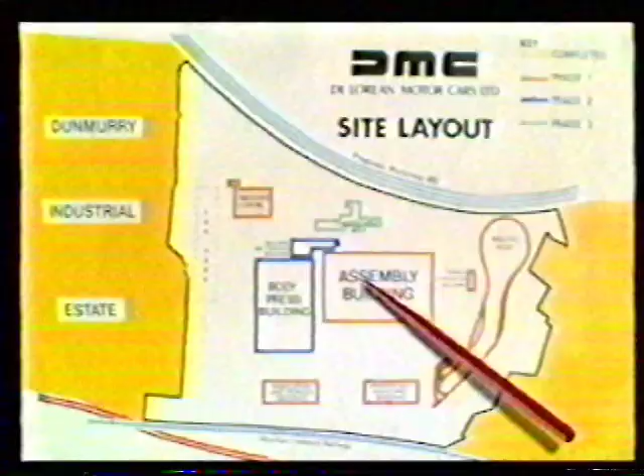Twinbrook Estate up the top here, and the main factory here. This was the original building, which was a carpet factory before we moved into it. That became the training building and the initial sort of company, whilst the rest of it was going on. This was going to be the main office at one time. That actually didn't happen. But this happened, that happened, and a couple of other buildings here, which you can't even see on this layout.

These buildings were much larger ultimately. The boiler house was there, the test track was there. I think some of you have seen that already, and you'll certainly see it tomorrow.

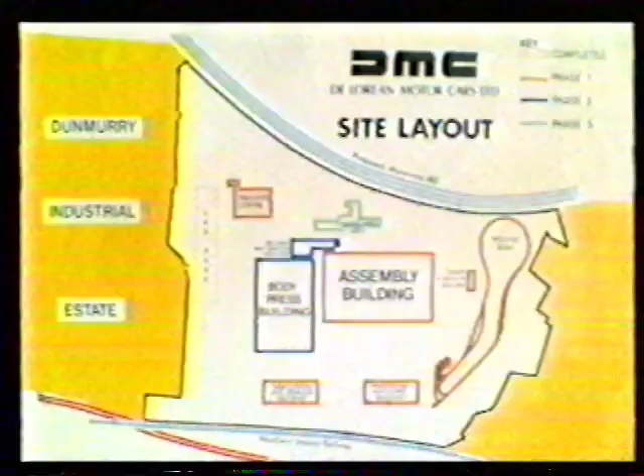There's the original building and the original entry there through Twinbrook. You'll have noticed that the later entry was through the bottom end here by the railway bridge, and that originally linked to the main Derriaghy Road, where it doesn't now. You have to go up through the industrial site.

So that was the site, the original site, just the other side of the railway from here.

One of the problems we didn't anticipate was snow. Never rains very much, and it never snows in Ireland, they said. It's a lovely mild climate. Grass grows 10 months in the year. No real difficulty, they said.

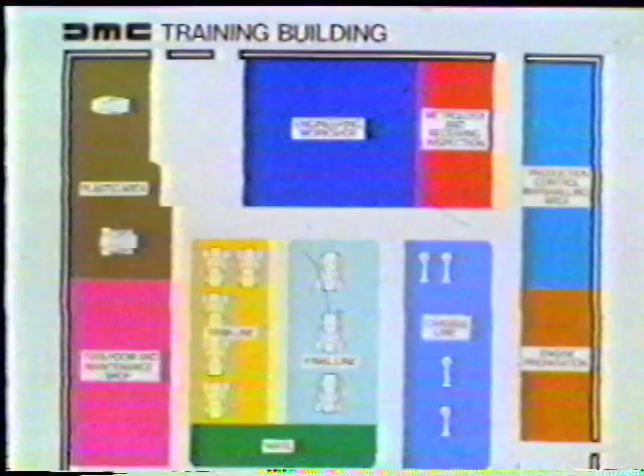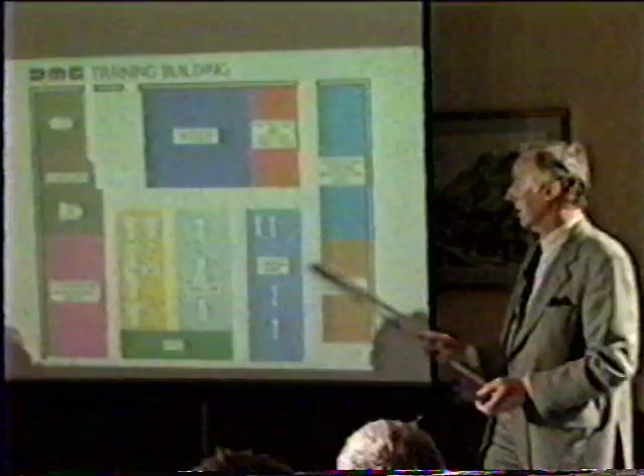One of the big advantages of Northern Ireland from our point of view was that although there's a great tradition of engineering over here, it was at each side of automobiles, shall we say, shipbuilding on one side and aircraft on the other. So whilst you might say you're starting from scratch with engineers, people building cars, you didn't have to unlearn anything. They started clean. Whereas if you picked up a crowd in Coventry, for example, you'd have to get rid of all their nasty little tricks before you started teaching them new stuff. So it was really training from scratch, hopefully quickly enough for them not to get into any bad habits.

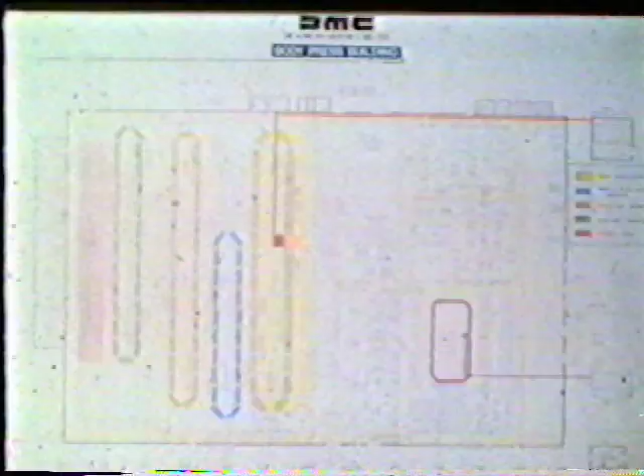This was the layout of the body press building, as it says. It's an official slide at the time. It's a pretty lousy one. However, I'll just point out 3 tracks which are fairly obvious there and one longer one here. The body, i.e. the fiberglass hull, was made in that area. The construction system consisted of hand laying the fiberglass mat into tools, into dies, and injecting the resin, closing the 2 halves of the body together, allowing them to preset green, taking them through the oven so that they finish the cure, and then finally taking them through an oven to take off all the flash and what have you, excess material.

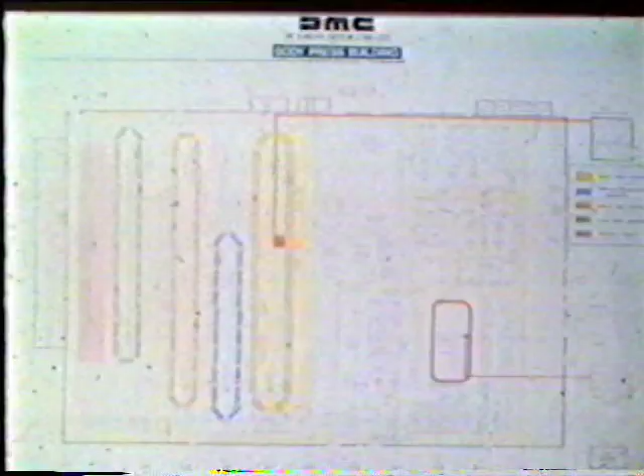Now the assembly building, you recall that the body press shop was that side there. So the bodies were lined up and brought, they were lined up through a 24-hour production ratio and pushed across here to keep the production line going. Of course, this process was a lot quicker than the body press shop process. So we stacked them up over there and brought them in here for the next day. We saw on one of the first slides the dock levelers here with the incoming materials.

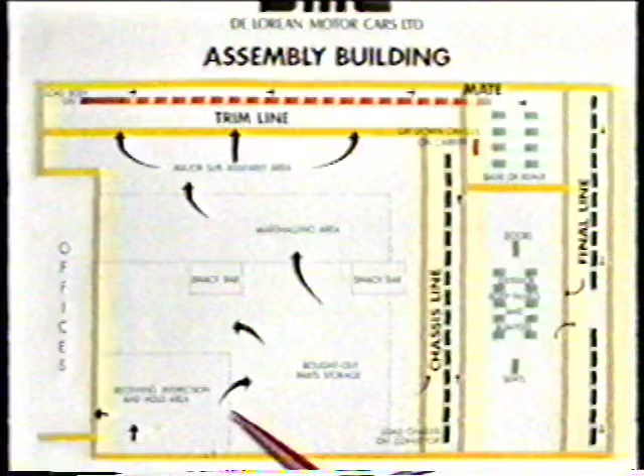So you've got materials inspection, bought out parts storage, snack bars, and so on. This lot was used to feed the line during the day. The idea was to do it overnight, in fact, but it didn't always work out like that. So they all fed the line there.

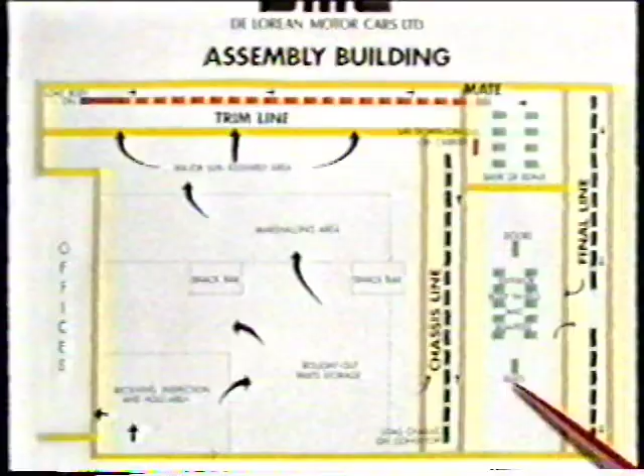We had the chassis line, the chassis dress line, being fed from one of the other outside doors here. See that again in a moment. Came together there, body drop in this general area, chassis drop onto the teller's carrier, body drop on top of it, and then round into picking up the doors and exterior panels. Finally here, which isn't shown, we had the rolling road to test the brakes, lights, steering and all that sort of thing, and to make sure it complied with the regulations.

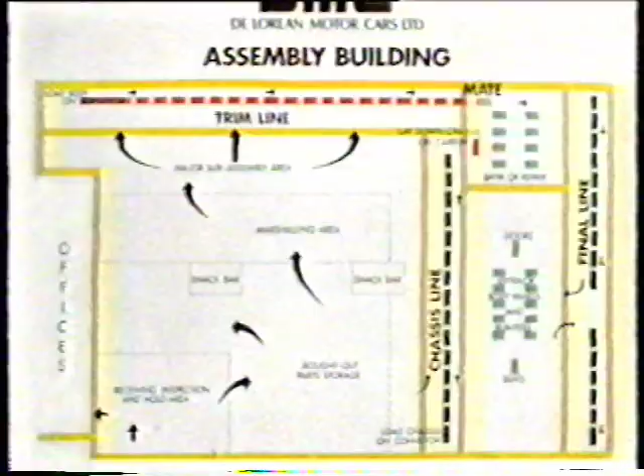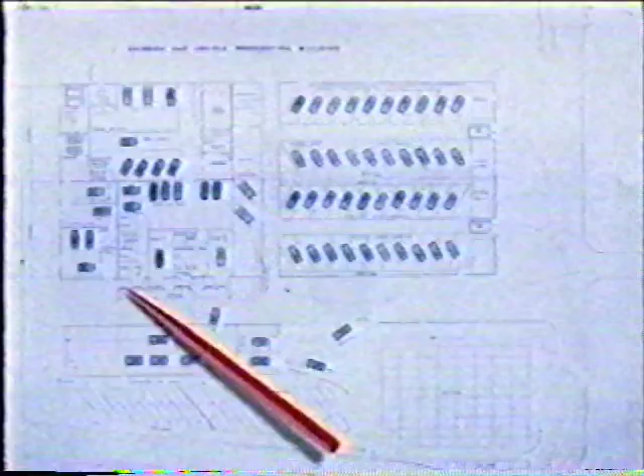There was an area in which the whole vehicle would be soaked for temperature for a given amount of time, a day and a half, something like that, to make sure it was at a regulation temperature. They would then be properly checked for the whole emission cycle before they were put out for sale. This area here was final preparation of all cars anyway, so a percentage of these would have gone through that anyway. So the cars came out of the main body assembly shop, which was up the top there, into this lot, through all this arrangement, and then finally pushed out, hopefully straight down to the docks.

So part of the testing, of course, was to go around the track, and part of it also was to go through the water test. Okay?

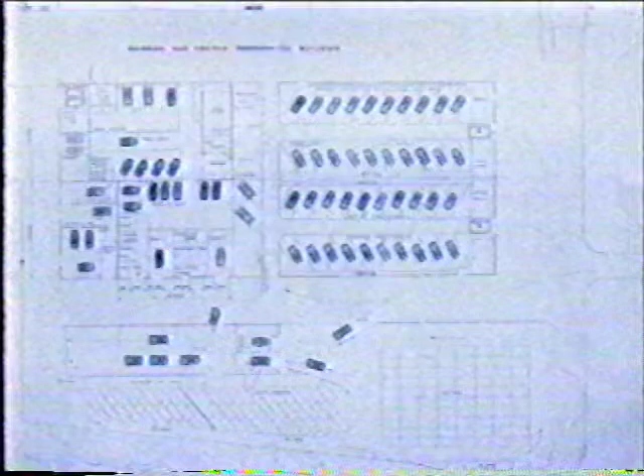As you all know, the bodies were made of fiberglass hull, using the VARI system - vacuum-assisted resin injection - a process which Colin Chapman personally owned and had patented.

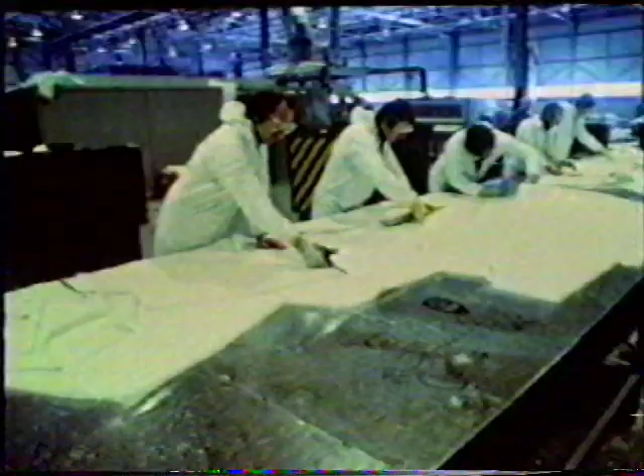So each of the bits of fiberglass mat was cut out by hand prior to being laid into the tool. There's a bevy of them. They were obliged to wear goggles. You can see rather more there, 60% of them wearing them. They're awkward to wear, but you only need one piece of glass in your eye, and you realize how valuable they are, because you can't get glass out very easily. Let it work out over a period. So you can see them cutting around the lines they've made with the templates.

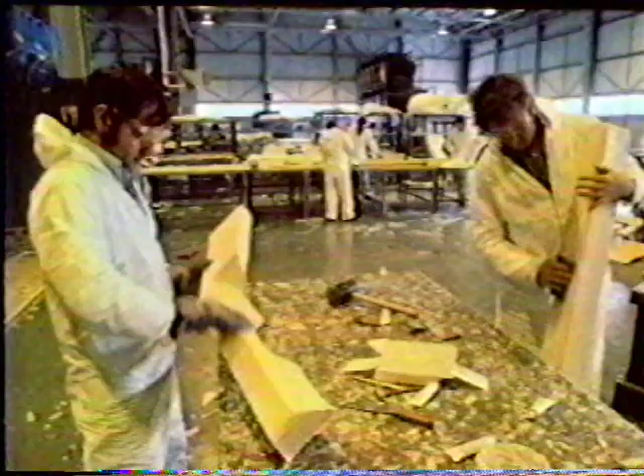The fiberglass hulls were made up, as I briefly described, with fiberglass mat laid into a mold, but for stiffness, additional strength, beam strength and so on, we used beams. Now the beam itself didn't give the strength, it was the structure around the beam that gave the strength. So these beams are made out of polyurethane foam, semi-rigid polyurethane foam, in a mold. These are the operators cleaning them off, removing the flash lines and so on, prior to them being wrapped in fiberglass mat.

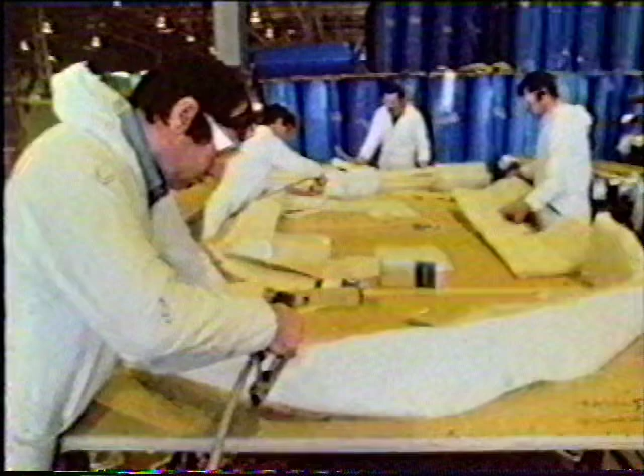Which you can see them doing here. Or you might have to take my word for it. Yes, here we are. These are the rigid polyurethane, or semi-rigid polyurethane moldings, with the lads wrapping fiberglass around them and stapling them on prior to being placed in the mold.

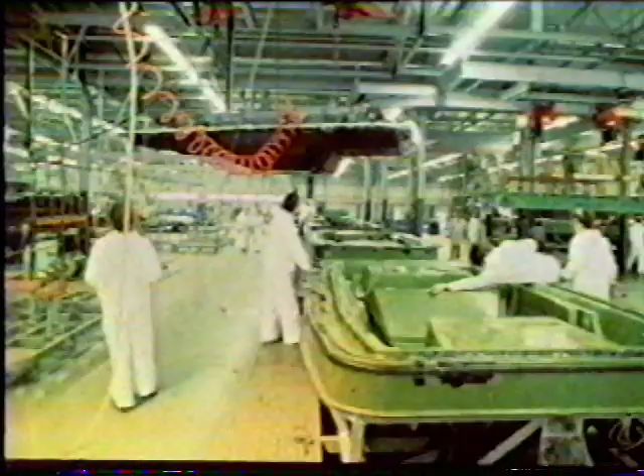Now these are the molds I was talking about. We saw them on the first parts of the track in the body press building. So these are the molds. That's the bottom part, shall we say. This is one where the top part's been - that molding's been lifted out. But this would have a mating part which would drop into it and form the other side. It's a double-sided die, effectively.

These are made out of epoxy resin with a filler and a steel frame. The top part of the die would close onto that when it's been loaded up. The whole would be subjected to a vacuum, and then resin introduced at various areas around it. Just the right amount so that it would fill in and form right to the edges. Not too much, else you scrap it, or waste too much, and not too little, else you spoil the whole molding.

Here you see them placing the fiberglass mat into the dies. We saw them cutting them out. They obviously have to be cut out into some quite complex forms so they fit in the right places, and they have to be fitted in the right manner. So there you have them doing it. You see the number of dies we've got coming through to maintain the production time cycles.

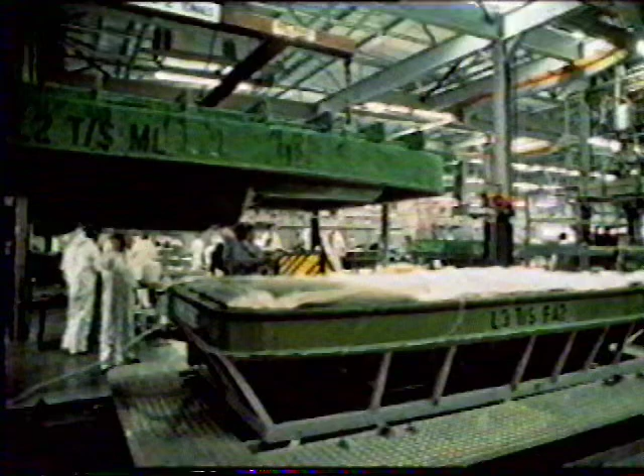That's it full. This is the top part of the die being prepared, ready to drop in. So that would form down inside with a bit of care to make sure that the fiberglass still lays in the right direction. The seal around the edge here would become tight around the edge of that before the vacuum is applied.

In order to maintain the quality of the fiberglass resin mix, we used to have, rather primitive by current standards, a computer system to make sure that it was at the right temperature, used in the right chronological order, the incoming amounts. The storage tanks I referred to were kept at a constant temperature and constantly stirred to make sure the quality of the fiberglass as used was more or less constant, reasonably consistent within reasonable standards. So we used that to make sure the quality of the fiberglass injection system was reasonably constant.

Having injected the relevant quantity, then of course it's left for a certain amount of time in the mold for the thing to at least cure to the green condition. So this is it being lifted out. You can see the track rotating, as it were, around there, circulating.

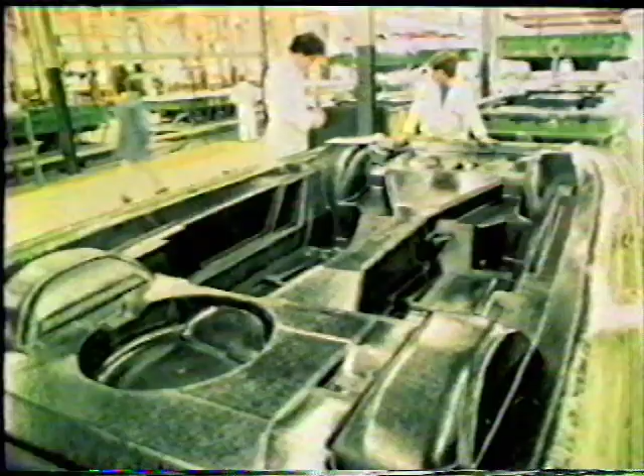And that's what the bottom part of the hull looked like. That's still in the die, of course, before it's popped out and before anything's cut off. You'll notice the door apertures are full here, and the various holes in the floor are still there. They're left in at this stage to try and maintain the dimensional integrity of the chassis, of the body.

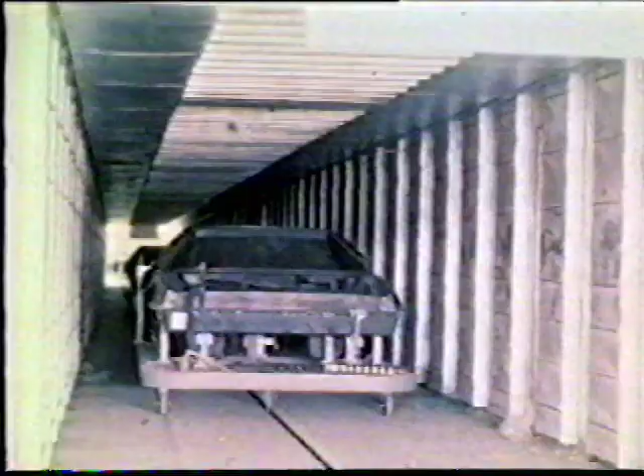You can see the other dies ready, all going around on the circuit. Having taken them off the machine, as it were, green, they stood for a while before they went into the oven, through which they passed relatively slowly.

You can see the top part's been attached to the bottom part here. It was bonded, and we used a staple system to hold the two parts together. Quite simple, rather crude in some ways, but it was effective enough. The staples were only there to hold the things together while the bonding material went off. You use resin? Yes, we use resin bonding, epoxy adhesive. We tried all sorts, but...

So you can just see the excess oozing through there. So that was quite a long process again. Not really a mass production process unless you've got enough of it.

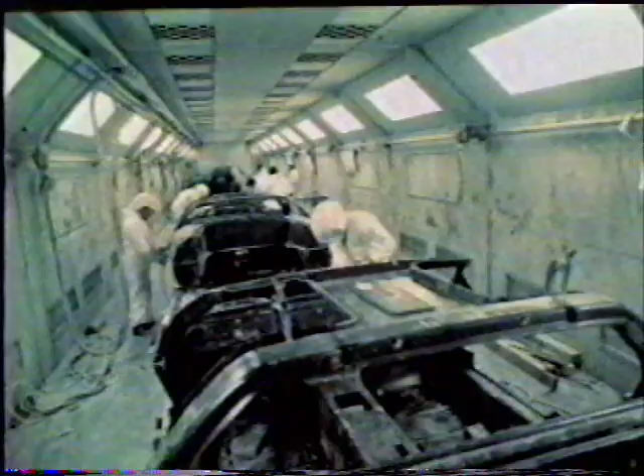Now here's the fettling bit where all the flash was taken off. You can see all these operators working here. It was a very labor-intensive system. It wasn't intended to be, but it turned out to be because we couldn't perfect automatic equipment in the time that I was with the company.

We tried a lot of it. We had immense problems with tracking around the apertures. We had lots of problems with wear and so on. Eventually it came back to these individuals working in what I would consider to be a horrible environment, although they're all hooded and screened and what have you with their private air supplies and so on.

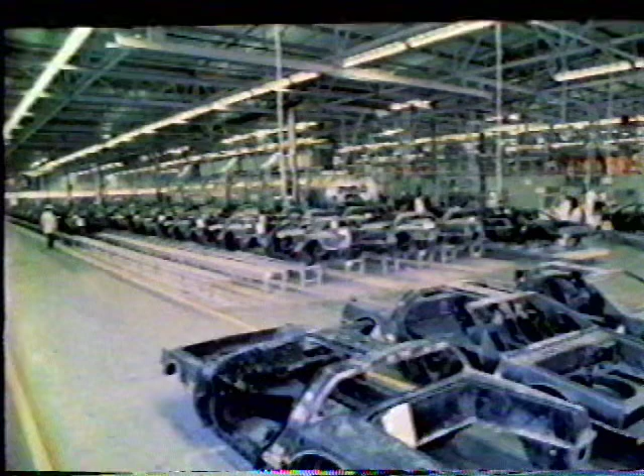And that was the situation, I should say, first thing in the morning, because you'd had all the day shift and possibly the night shift. And here was the stock of underbodies, hulls, whatever you like to call them, ready for the next day's production.

At this stage, you've got the whole thing completely fettled with all the steel mounting brackets bonded to in the right places for the torsion bars, for the door locks and seatbelt mountings and engine mountings and so on and so forth. Naturally, the quality control side of it, the inspection side, would pull these off every now and again and check them all over for general integrity, dimensional integrity.

One of the big problems with fiberglass is that tolerance variations can be up to half an inch in the normal run of production. And that's extremely difficult if you're hanging a body onto it, which is going to be to 20 or 30 thou. And that meant that we had to make the body panels all individually adjustable, which led to enormous problems initially on production because everybody adjusted everything and they never actually fitted.

So you go round and round in circles trying to make them fit. Eventually, with care, you can start in one place and work steadily out in all directions, and that's the best thing you can do. You've got good accurate data, and the most difficult part is getting people to stick to it, because they love to adjust things. That's the skill in adjusting things, and it takes forever.

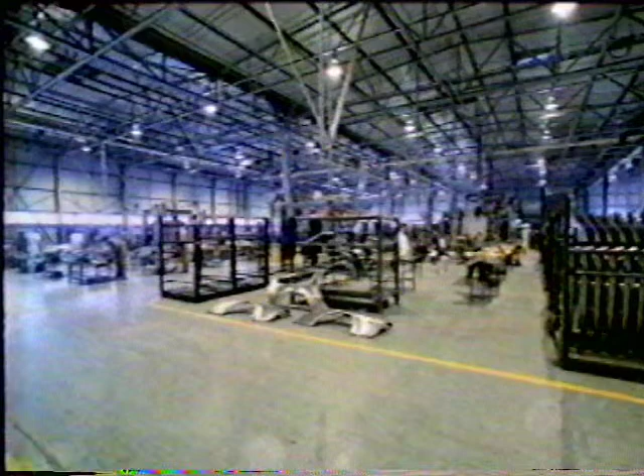Another side of the business was the preparation of the steel panels. You can see the preparation of panels here, preparatory for joining them together. You will recall that the panels are clinched together where they have inner and outer panels, spot welded in some cases, but for the outer panels they're all clinched. You can't spot weld them because the spot welds show through.

The bonnet was something that was bonded together also. But even the clinched ones were bonded before the panels were actually formed, to hold the two in the right relative positions.

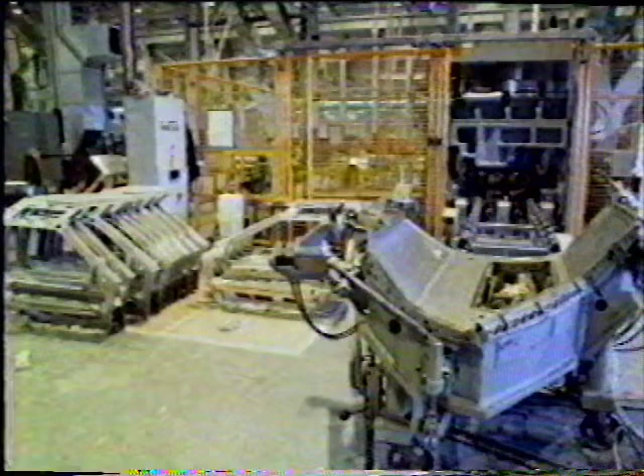These are body panels as brought into the factory - these are doors, of course. They would be laid into these individual tools, and the first part of the bend of the outside edge prepared prior to laying in the inside part of the door. You've got to start the bend somewhere, so the automatic machine you see in the background can then clinch the panels together.

These are door structures which go inside here, all pre-prepared, made up of various sections spot welded together. So these were the interior door panels pressed out of quite thick stainless - you get an impression of the thickness looking at that one - and spot welded together.

One of the difficulties with gull-wing doors is not that of strength, but of stiffness. You will all know that if you grab the front of your door and try to slam it, it jams. And before we put those wedges on the front, it used to take lumps out of the adjacent bit before it jammed, so you had a compound problem.

But it's extremely difficult to make them stiff. When you think that the hinges are only that far apart, and you've got an overhang right down to here, it's a very awkward job. It's a huge moment for a starter, and also you've got the weight in here, which makes other problems.

The stainless steel torsion bar at the top there was very effective in holding the thing up. We did depend a little too much, I think, on the gas struts, because they're temperature sensitive and the loading isn't always the same, as you will also realize.

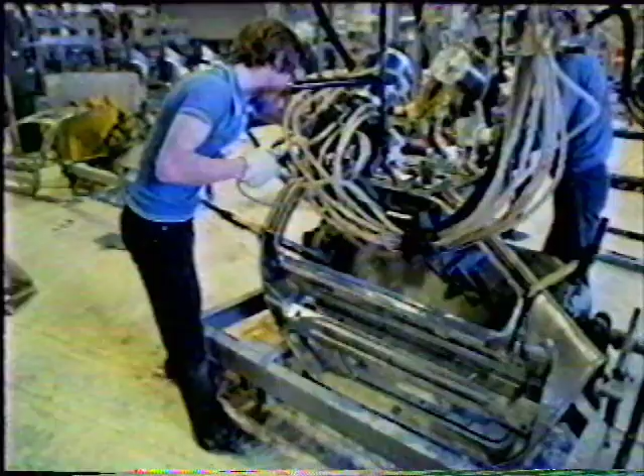Okay, so let's move on from there a little bit. Further section of the jig structure, holding the panels, the substructure panels together in the door inner pieces we were talking about a moment ago.

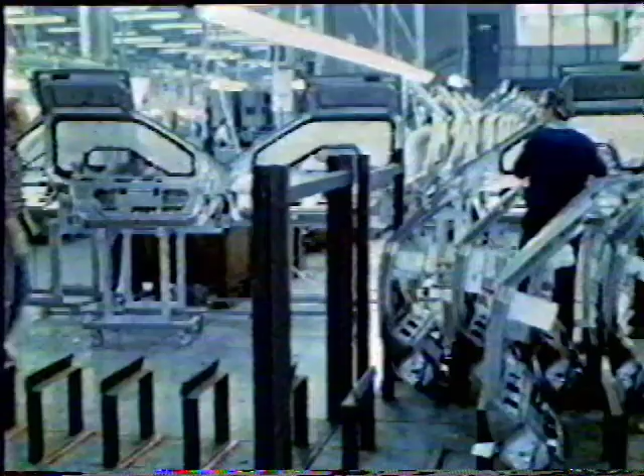I don't seem to have the one clinching. These are doors which are finished in the steel construction going down the door assembly line. Now that was quite a long drawn out business. Each door was assembled individually, in pairs of course, prior to assembly onto the vehicle. So they're all pre-assembled and hung a little bit later in the process.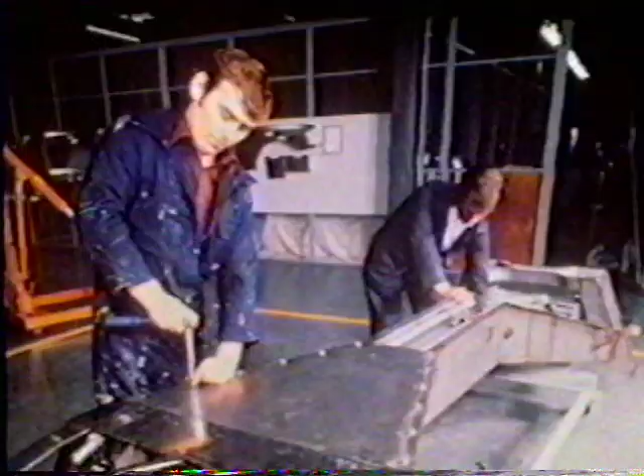So the chassis were delivered in batches like this on stillages, ready to come into the factory. These are the chassis, as you can see, when they've been first brought into the plant. So you can see here this operator just running a tap into the various holes, the tapped holes.

One of the biggest problems you can have with a chassis, however you do it, is whatever finish you put on it getting into holes. Now we looked at all sorts of ways of doing this, having gone off the stainless steel, not least of which was zinc plating, which is a lovely finish and it stops it going rusty. Second almost to none in its effect. However, it fills holes up, also second to none. So we didn't go that way.

We went for this epoxy finish where we heated the steel chassis and dropped it into liquefied powder, basically. And well, the chassis was hot, so it melted the adjacent powder to it, and it formed a nice hard finish, semi-hard finish, I should say. It wasn't really hard. And here you see the fuel tank protection plate going on underneath the chassis. That being the back of the chassis, this being the front, of course.

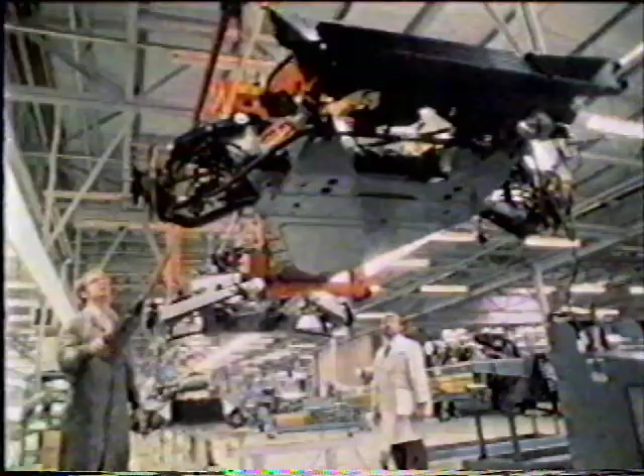Now then, these were where the chassis were taken off the chassis build line prior to being dropped onto Tellus carriers, prior to having the body dropped onto them.

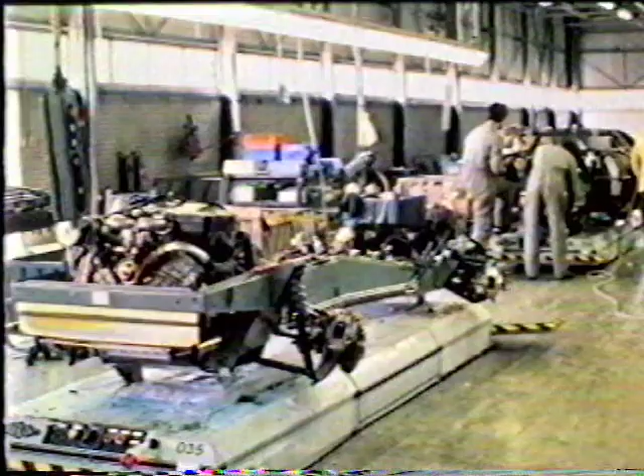These are the famous Tellus carriers, which gave me several heart attacks over the period. They were supposed to stop before they got to you, but they had this very unnerving way of stopping and making little darts at you. And knowing that they could chop you off smartly at the knee, it was a bit of a pain. But these followed a track in the floor, of course. It was one of the first large-scale uses of these things, and they were very successful, actually. We could plot them round, we could park them, bring them in as and when required. So it was a very satisfactory way of doing it.

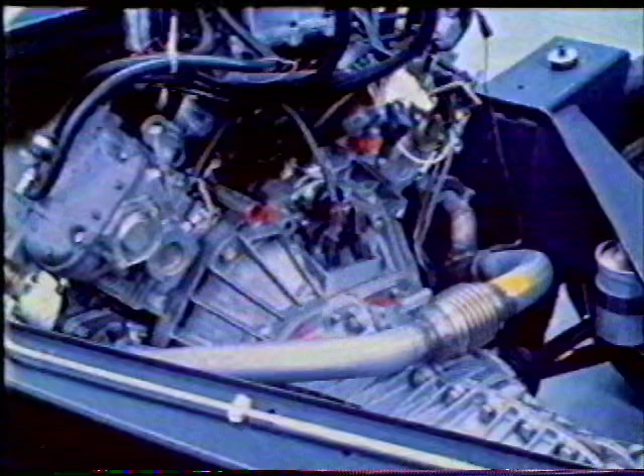The chassis came into the factory at a separate point, into the main assembly shop, and we saw somebody on a slide or two back preparing the holes in the chassis, preparatory for assembly of the various subcomponents. These were assembled on a separate track. The engine, we had engine dress feeding this track. This was the chassis build line, which itself made its way up to the body assembly track.

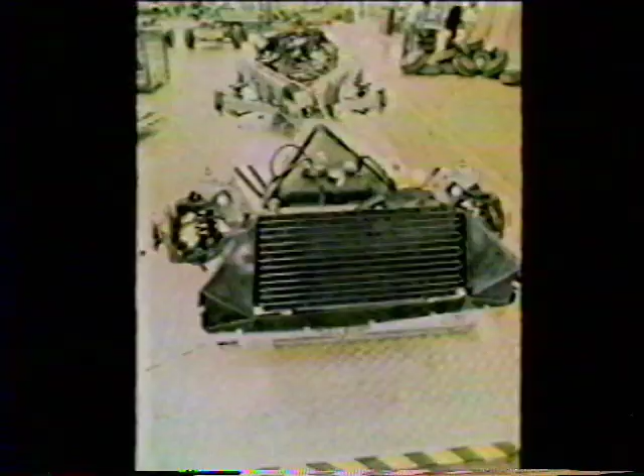Another view of the same track. Here you see the complete chassis, virtually finished, working from the front with the radiator and so on, suspension, fuel tank, right the way back to the engine and so on and so forth, the gearbox, rear suspension and so on. Almost ready there for body drop. So that's on a Tellus carrier, yes, all ready to move around the factory.

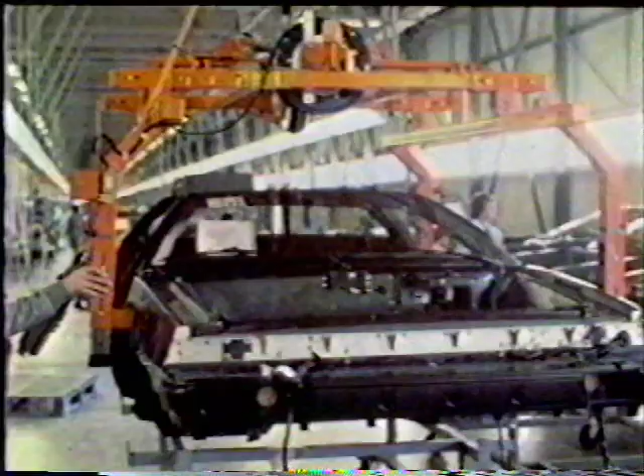This is the beginning of the body assembly track, with the body straight out of the body press shop, ready for general assembly with a route card on it and build sheet and so on.

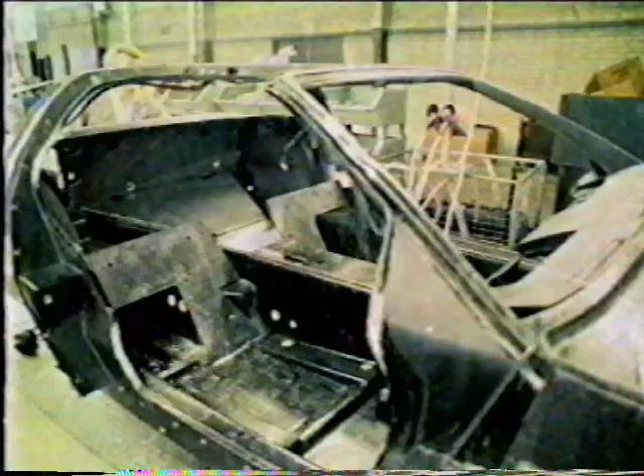Here you see it on the track being prepared, various sections cut out. These were wood, I don't know whether they were all the way through the period, being fitted in, cut to shape, various bits being fitted around the car, various bits lying on the floor ready to be fitted.

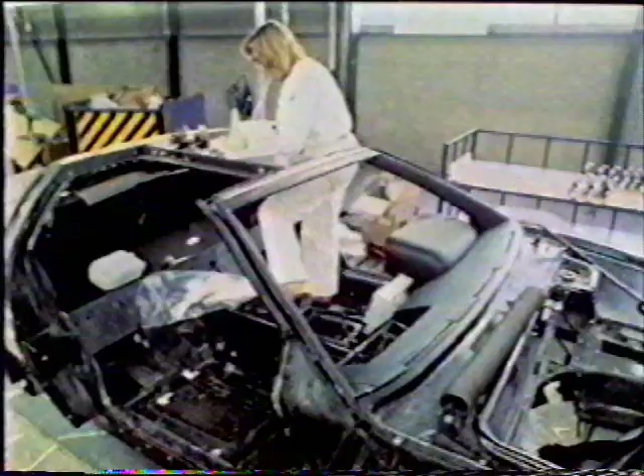I always show this one to demonstrate that we did have girls on the line. You wouldn't know nowadays with the hair, but in those days it was a bit more obvious. You have to lift their tails up to find out, as they said.

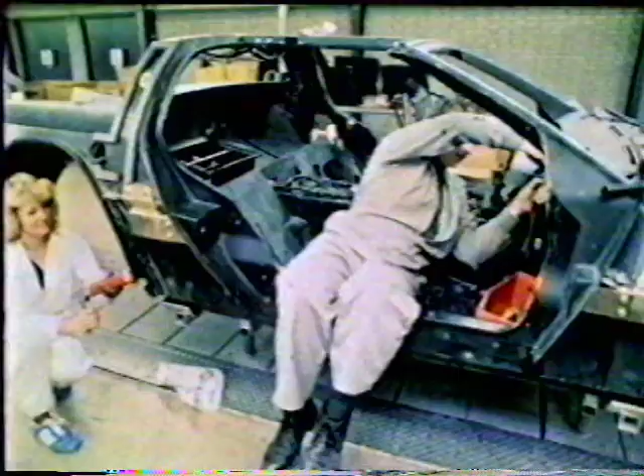So that's the beginning of the body assembly line. That's further proof it wasn't set up - they actually did work on the track. Car being steadily assembled prior to mating with the chassis.

There's another view of the track, again looking from the body press shop end. Here's the moving track - these are the stores coming up from the general store for assembly onto the car. Further down here we had the chassis build line and the door build line. Beginning to look more like a car at this stage, although bear in mind it has no chassis still.

Now here you have a Tellus carrier with a chassis on it and the body hovering over the top. So this is the body drop area, more or less complete as far as it goes. Those two would then be brought together prior to moving into the body paneling area.

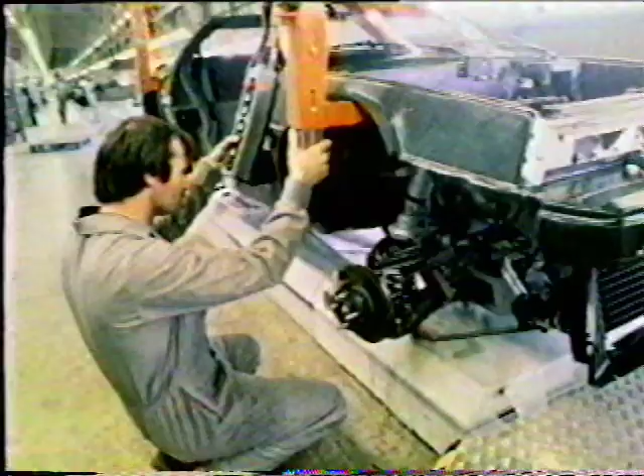There's a further stage in the body drop - body almost in contact with its eventual chassis.

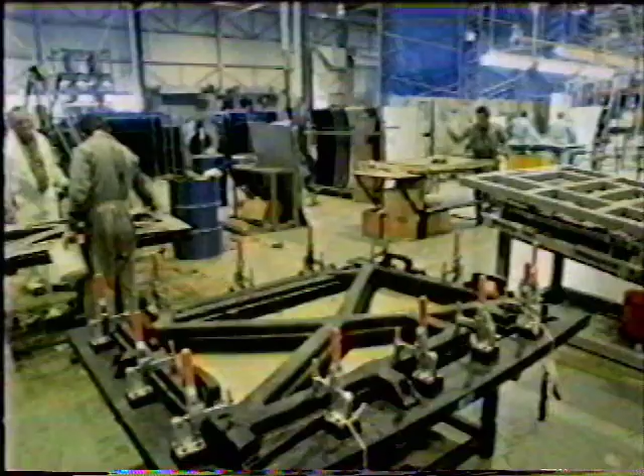Here you have the bonnet assembly, which is one of the areas which I said was bonded. At this stage, we bonded the whole of the cruciform to the inside of the panel. You can see one lying on top of a fixture there.

So here you have the final part of the assembly, as it were, with the doors beginning to be assembled in position. You recall I was talking about the amount of adjustment available on panels, which was a nuisance. Really, the starting point was the center of the roof - get that in the right place in relation to the chassis, and everything else should go well.

So you start with the central panel there, the central heavy steel hinge member, and the panel over the top of it, and the two doors. Then all the other panels could be fitted to it, and the clearance is adjusted - the famous torsion bars, which everybody's so fond of.

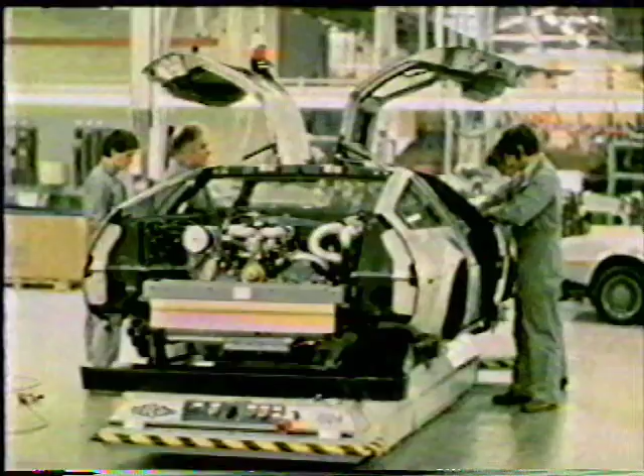The next stage, more panels going into position, hopefully in the right places. Don't forget they have to fit at both ends, which makes life pretty complicated. They've got to fit the bumper, or the polyurethane assembly, at each end, which in itself has quite a big tolerance variation. So you have all these things adding up.

I expect they're struggling and swearing at it there, but that's just a further stage in the move, although that's moved quite a long way forward because it's got its wheels. So that's right at the bottom end of the production line.

The vehicle is almost ready to be taken off the Tellus carrier, and the Tellus carrier sent back on its way.

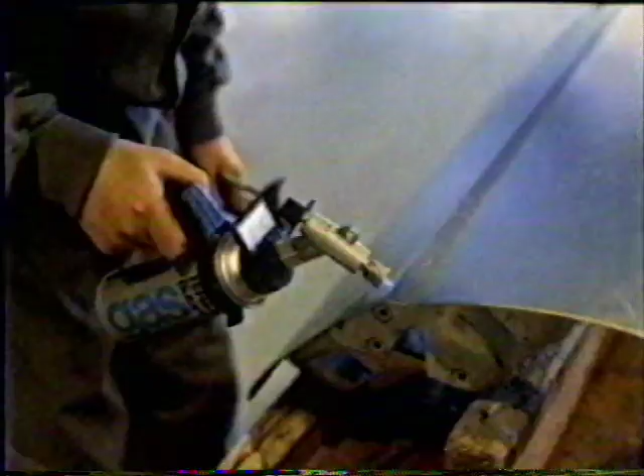We talked about repair of panels earlier on, and these are a couple of slides that I put together to illustrate really how easy it is to repair the panels. It is not very much more difficult than standard repair of ordinary steel panels.

Here we had dented one. To some degree you can get it out in conventional way by heating and cooling it and coaxing it out. You can also hammer it out, and then you see we're working on it here with levers and hammers and so on.

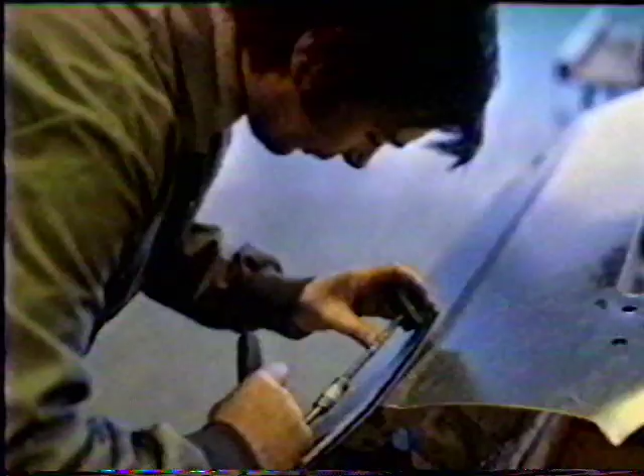Reproducing the finish at the end of the day is probably the worst problem, as we said earlier. We used what we called Engis wheels, which are flap wheels, abrasive pads, which were pretty satisfactory. It's very difficult to get them going in the right direction, as Alan was saying earlier. Also, it is very obvious if you're not careful.

In a sense, you end up doing the whole panel, rather like you do with a metallic paint - you have to blow it in for the whole lot so that you can't see the join. But whatever you do, you don't use metallic things. You use Scotch-Brite or something like that - an abrasive pad, I should say, really.

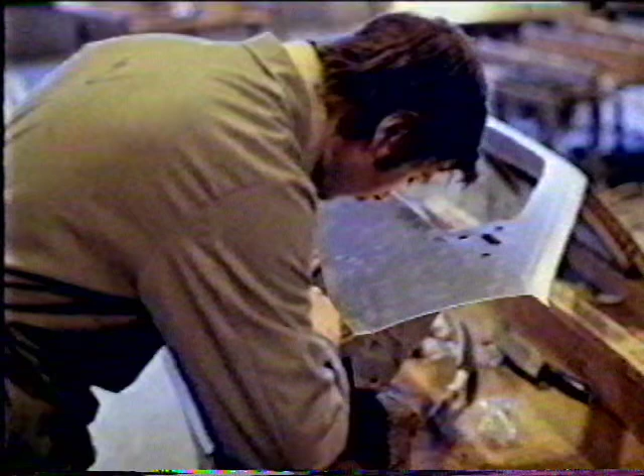So here we are, further work on it. It is just generally to illustrate that normal working practices, normal situation will or can be applied to repair the panels. It's not difficult.

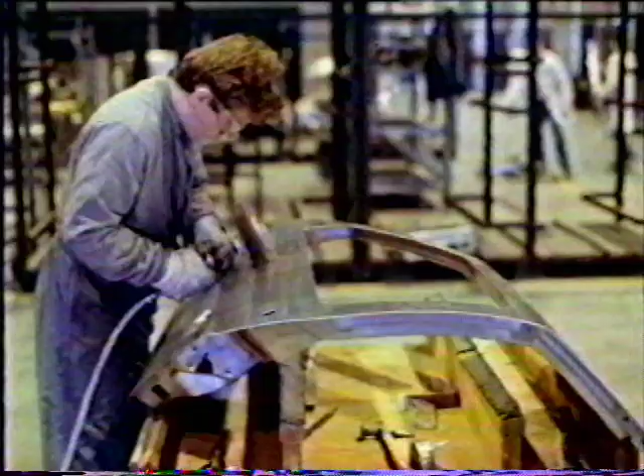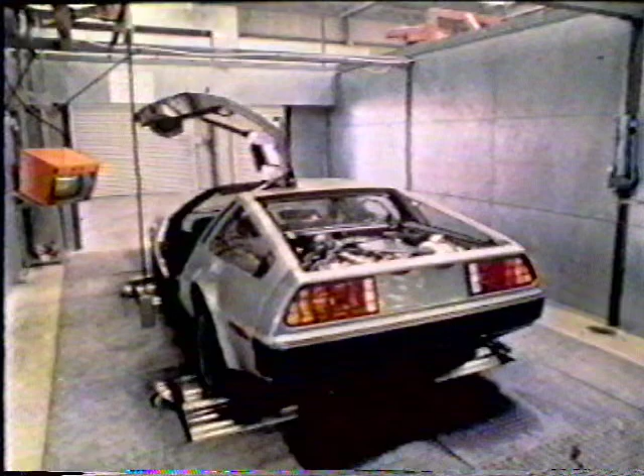So we've come off the end of the production line now. That is, to all intents and purposes, a complete running car. It hasn't got the back end on, but it is a complete motoring vehicle. So it's gone onto the rollers here.

Did we have two rolling roads? Yes, we should have done, yes. I know we started with one for a good period until production built up.

The driver would sit in here and effectively drive it, following the instructions on the screen there, just as we do nowadays on emission testing and such like. So he would test the operation of all the lights, the brakes - we didn't do the emissions here - but all the usual bits and pieces around the car.

And that is just before the final door out of that building.

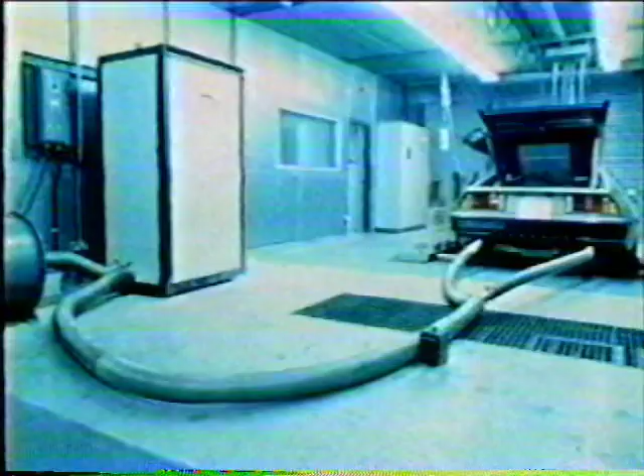This is a picture of the setup in the emission laboratory. I don't know how many of you have been in an emission lab, but they all look roughly the same. Run the car on rollers. The rollers have their own inertia setting so that they're roughly equivalent to the car inertia, so that you can drive as closely as possible to normal road driving and measure the exhaust coming out as a result.

You also do the economy testing there, which is part of the system and quite critical, of course. Exhaust taken out, fed through various extractors into the analysis laboratory on the far side there.

We had that in addition to the water splash, of course, which I'm not sure is illustrated here, but you've seen it down beside the test track there. We had lots of fun originally with panels not really being in the right places and seals not working properly. It's a tremendous problem, but we very soon got over it, actually. I don't think production cars suffered with the problem for very long, at any rate.

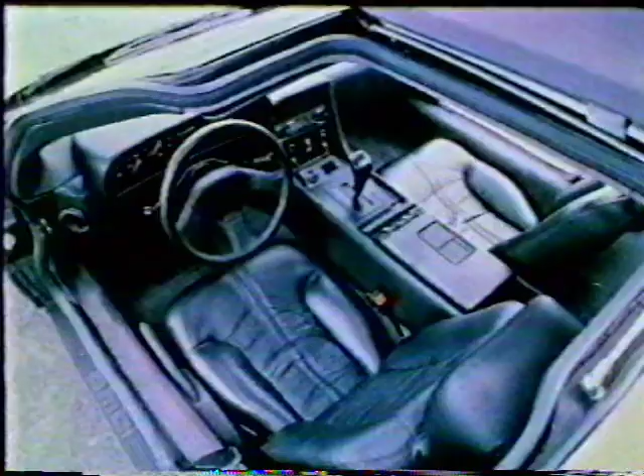Nice picture of the interior as they started out. These ripples were all molded in, of course. You appreciate that - it took a lot of research to get the right effect on that, or what they thought was the right effect.

If you've not been down there, it's a delightful part of the country. You ought to go before you go back. There we are. Thank you very much.